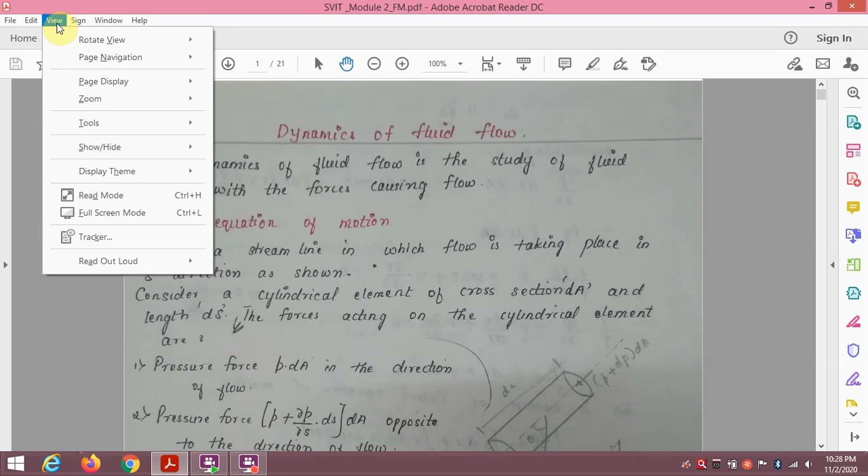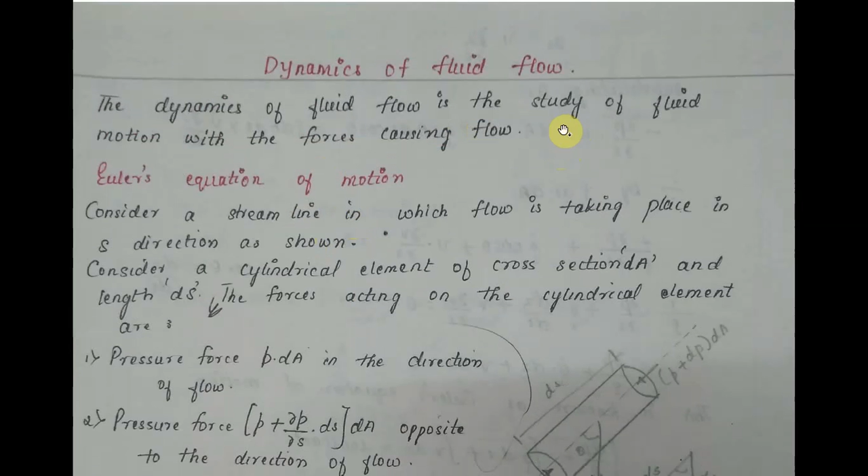So today I'm going to deal with the chapter Module 2 in fluid mechanics, that is dynamics of fluid flow. The dynamics of fluid flow is the study of fluid in motion with the force causing the flow.

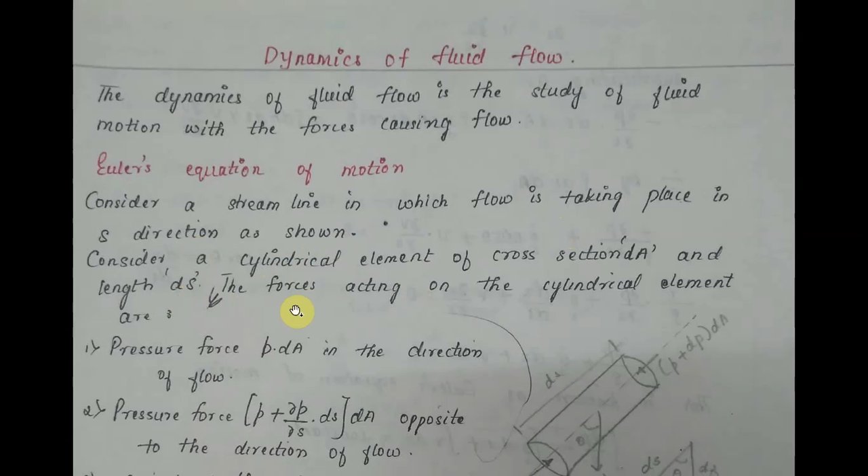So, Euler's equation of motion. Consider a streamline in which flow is taking place in the delta S direction as shown in the figure. Consider a cylindrical element of cross section delta A and length delta S. The forces acting on the cylinder element are: pressure force, that is equal to P into delta A, in the direction of the flow.

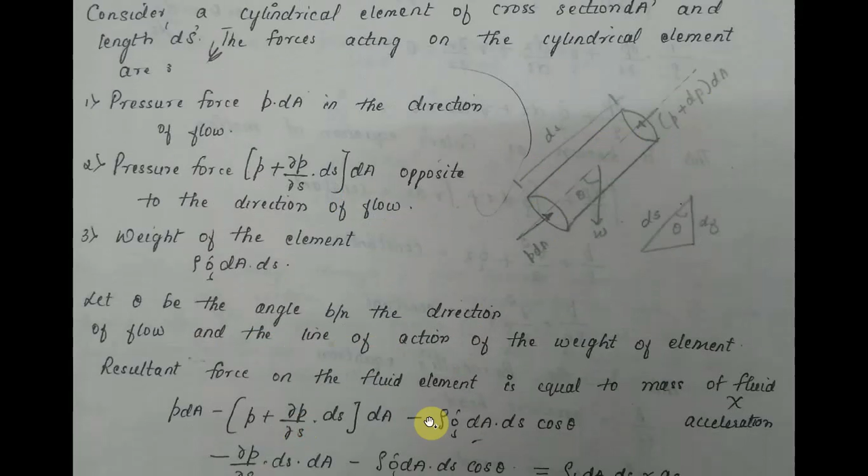Then pressure force, that is P plus delta P by delta S, that is P plus dou P upon dou S into delta S into delta A, opposite to the direction of flow. Then weight of the element, that is rho into G into delta A into delta S. Let theta be the angle between the direction of flow and the line of action of the weight of the element. The resulting force on the fluid element is equal to the mass of the fluid into acceleration.

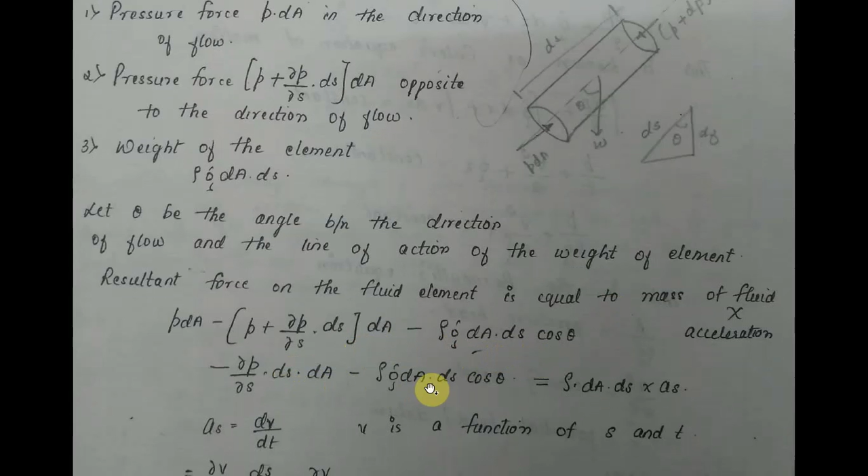Therefore, P into delta A minus (P plus dou P upon dou S into delta S) into delta A minus rho into G into delta A into delta S into cos theta. So, minus dou P upon dou S into delta S into dA minus rho into G into delta A into delta S into cos theta is equal to rho into delta A into delta S into a, where a is the acceleration.

Where a is equal to dV upon dt, where V is a function of S and t. Therefore, dV upon dt is equal to dou V upon dou S into ds upon dt plus dou V upon dou t, that is equal to V into dou V upon dou S plus dou V upon dou t, since ds upon dt is equal to V.

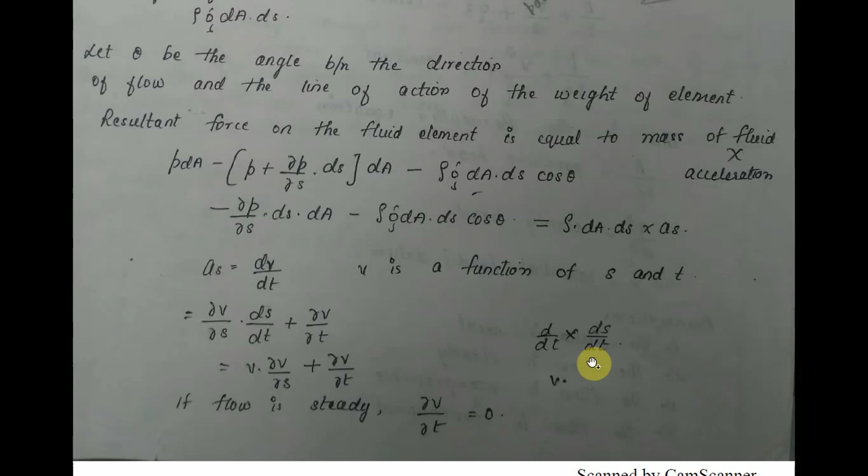Hence, if the flow is steady, dou V upon dou t is equal to 0. Therefore, a is equal to V into dou V upon dou S.

Substituting a, we get minus dou P upon dou S into ds into dA minus rho into G into dA into ds into cos theta, that is equal to rho into dA into ds into V into dou V upon dou S. Dividing throughout by rho into ds into dA:

We get dou P upon rho into ds plus G into cos theta plus V into dou V upon dou S is equal to 0.

Cos theta is equal to dou Z upon dou S. Therefore, 1 upon rho into dou P upon dou S plus G into dou Z upon dou S plus V into dou V upon dou S is equal to 0.

Therefore, dou P upon rho plus G into dz plus V into dou V is equal to 0. This is known as Euler's equation of motion.

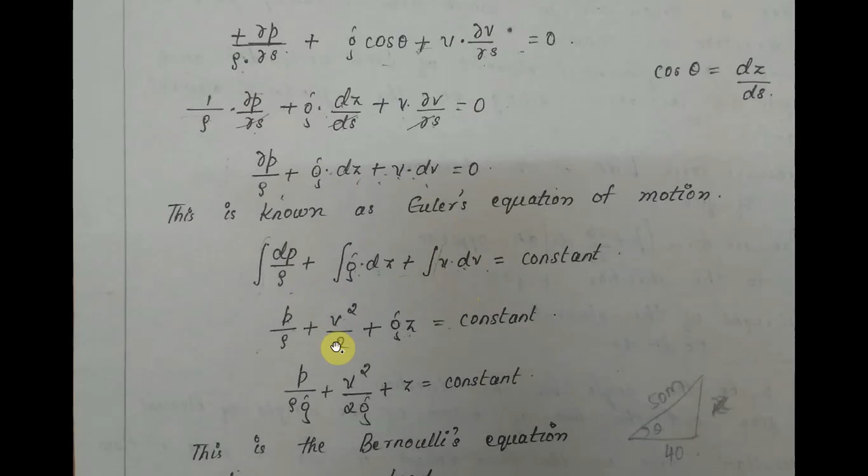Therefore, integrating: integration of dP upon rho plus integration of G into dz plus integration of V into dV equals constant. Therefore, P upon rho plus V square upon 2 plus Gz is equal to constant. That is, P upon rho into G plus V square upon 2G plus Z is equal to constant.

This is the Bernoulli's equation. Therefore, P upon rho into G is equal to pressure head, V square upon 2G is equal to velocity head, and Z is equal to potential head or datum head.

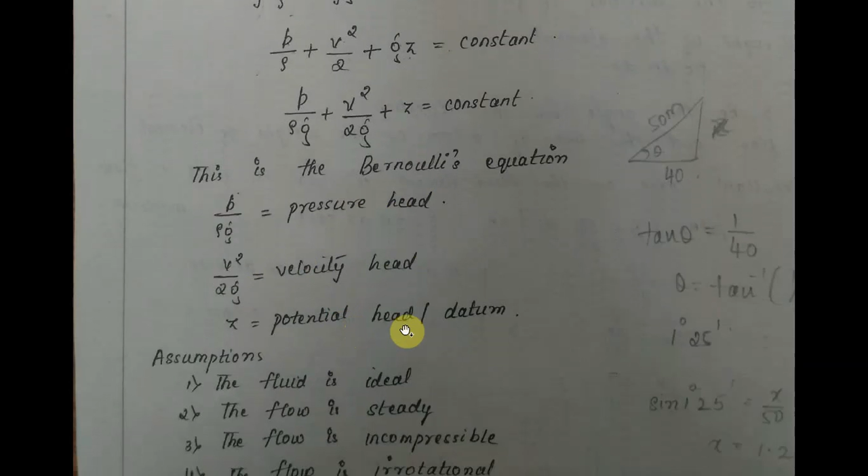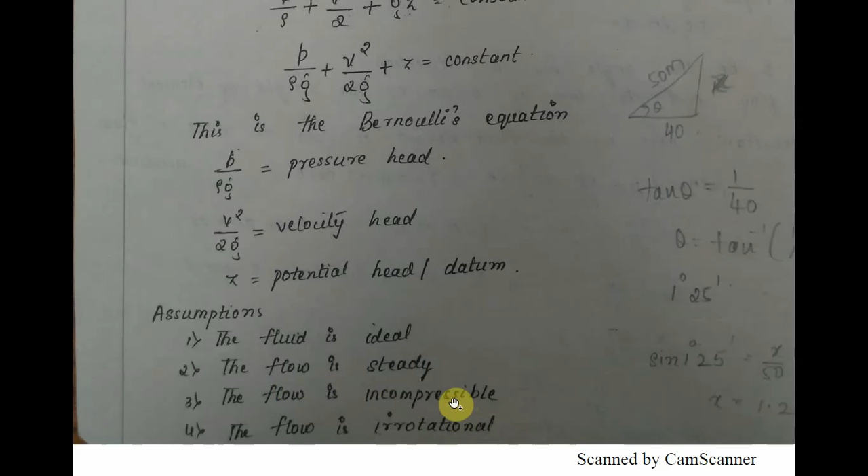So the assumptions for the above equation are: the fluid must be an ideal fluid, the flow is steady, the flow is incompressible, and the flow is irrotational. So these are the four conditions that should be assumed while deriving that equation.

So an example for this: water is flowing through a pipe of 5 centimeter diameter under a pressure of 29.43 Newton per centimeter square and with a mean velocity of 2 meters per second. Find the total head or the total energy per unit weight of the water at a cross section which is 5 meters above the datum line.

So diameter is 5 centimeters, that is equal to 0.05 meters. Then P is equal to pressure, 29.43 Newton per centimeter square, that is 29.43 into 10 raised to 4 Newton per meter square. V is equal to 2 meters per second. And Z is equal to 5 meters.

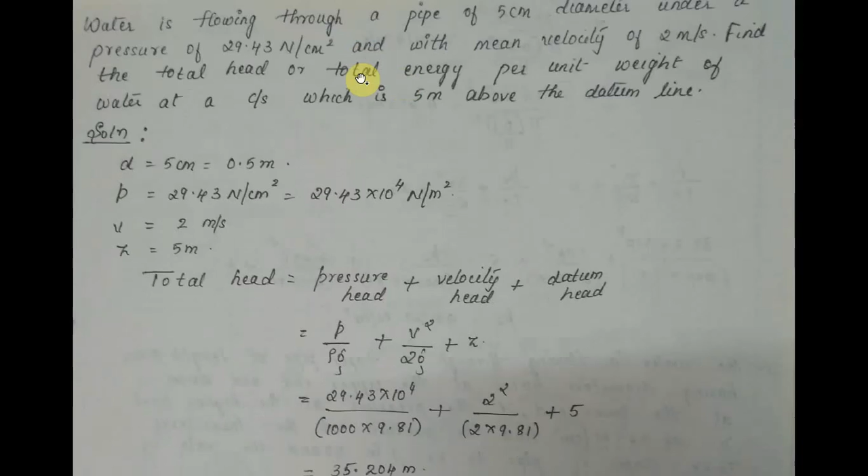We know the total head is equal to pressure head plus velocity head plus datum head. So the pressure head is given by P divided by rho into G.

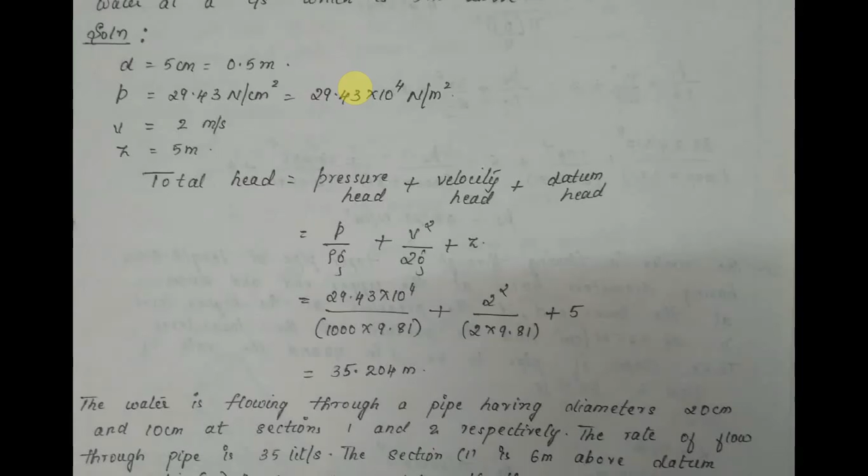Plus velocity squared upon 2g, plus z equals datum. So pressure equals 29.4 into 10 raised to 4, so 1000 into 9.81, v square is 2 square divided by 2 into 9.81 plus 5, that is equal to 35.204 meters.

The next problem: water is flowing through a pipe having a diameter of 20 centimeters and 10 centimeters at section 1 and 2 respectively. The rate of flow through the pipe is 35 liters per second. Section 1 is 6 meters above the datum and section 2 is 4 meters above the datum. If the pressure at section 1 is 39.24 Newton per centimeter square, find the intensity of pressure at section 2. So there are two sections: section 1 and section 2.

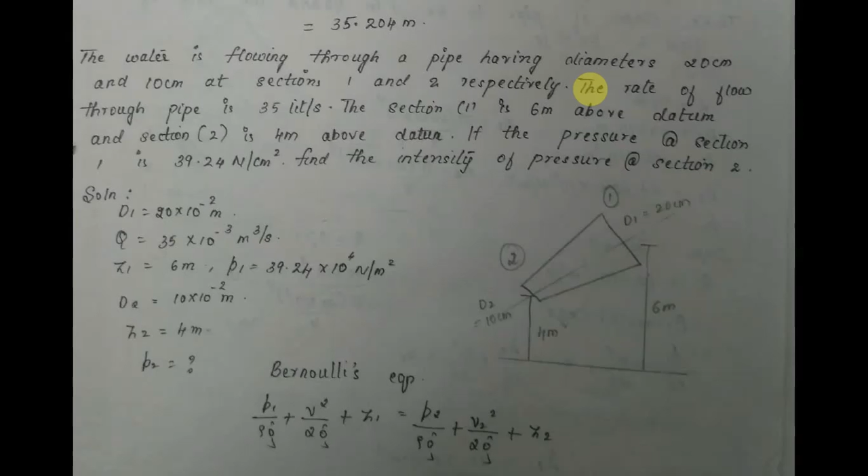Therefore d1 is equal to 20 into 10 raised to minus 2 meters. Q is equal to 35 into 10 raised to minus 3 cubic meters per second. Z1 is equal to 6 meters. P1 is equal to 39.24 into 10 raised to 4 Newton per square meter. d2 is 10 into 10 raised to minus 2 meters. Z2 is equal to 4 meters. Then P2 is equal to how much?

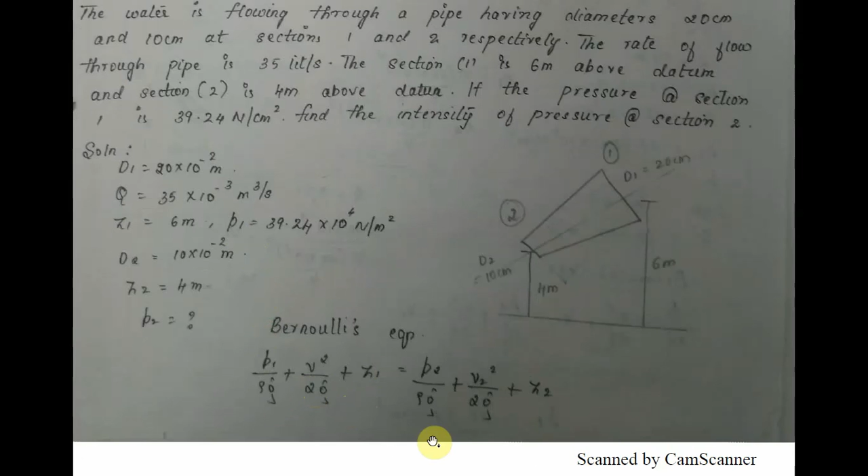Applying Bernoulli's equation: P1 upon rho into g plus V square upon 2g plus Z1 is equal to P2 upon rho into g plus V square upon 2g plus Z2. And we also know that Q is equal to A into V.

Therefore V1 is equal to 35 into 10 raised to minus 3 divided by pi into 0.2 square divided by 4, that is equal to 1.114 meters per second. And V2 is equal to 35 into 10 raised to minus 3 divided by pi into 0.1 square divided by 4, that is 4.456 meters per second.

Therefore P1 upon rho into g plus V1 square upon 2g plus Z1 is equal to P2 upon rho into g plus V2 square upon 2g plus Z2. So P1 is equal to 39.24 into 10 raised to 4 divided by 1000 into 9.8, plus V1 square 1.114 squared divided by 2 into 9.8, plus 6 equals P2 divided by 1000 into 9.81, plus 4.446 squared divided by 2 into 9.81, plus 4.

Therefore P2 is equal to 40.27 Newton per centimeter square.

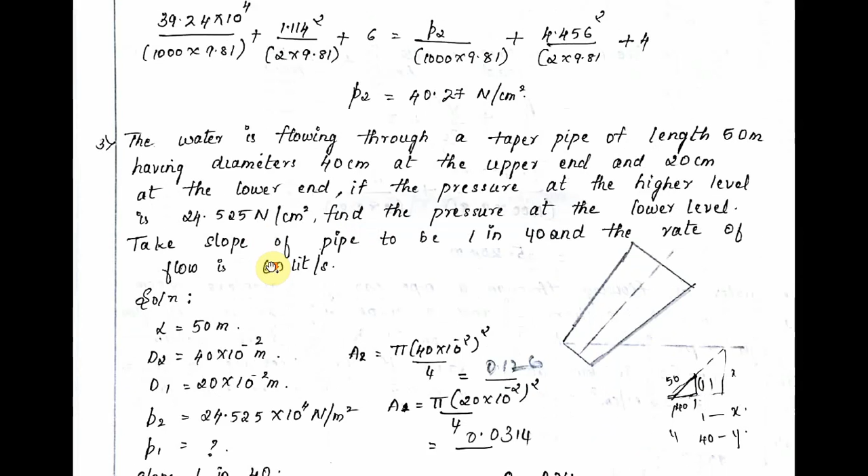Water is flowing through a taper pipe of length 50 meters and diameter 40 centimeters at the upper end and 20 centimeters at the lower end. If the pressure at the higher level is 24.525 Newton per centimeter square, find the pressure at the lower level. Take the slope of the pipe to be 1 in 40, and the rate of flow is 60 liters per second.

Length is equal to 50 meters and D2 is 40 into 10 raised to minus 2 meters. D1 is equal to 20 into 10 raised to minus 2 meters. Then P2 is equal to 24.525 into 10 raised to 4 Newton per meter square. P1 is equal to how much?

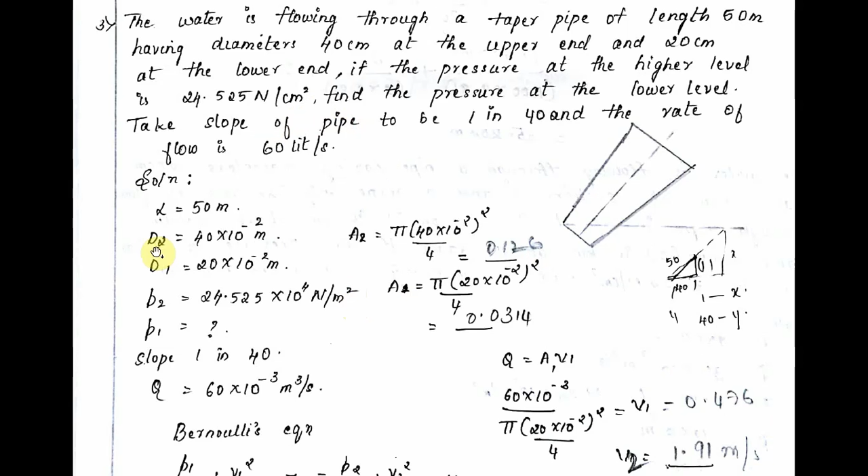A2 is equal to pi into 40 into 10 raised to minus 2 whole square divided by 4, then it is equal to 0.126. And we also know that Q is equal to A1 into V1.

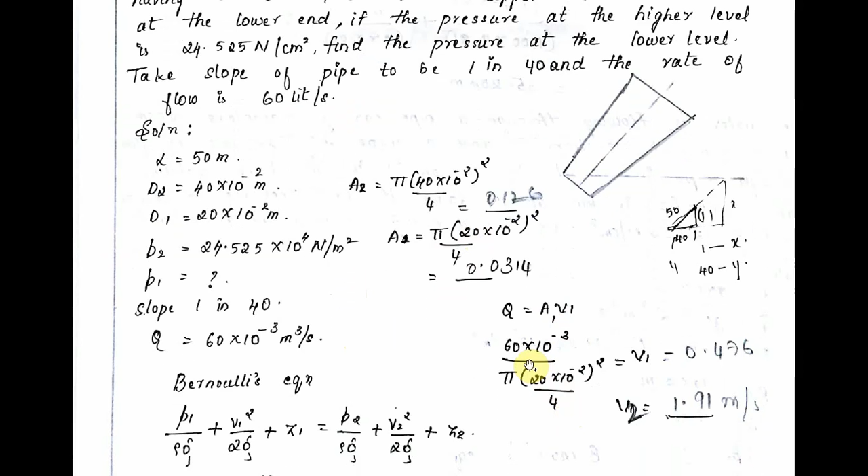Therefore 60 into 10 raised to minus 3 divided by pi into 20 into 10 raised to minus 2 whole square divided by 4 is equal to V1, that is equal to 0.476, and V2 is equal to 1.91 meters per second.

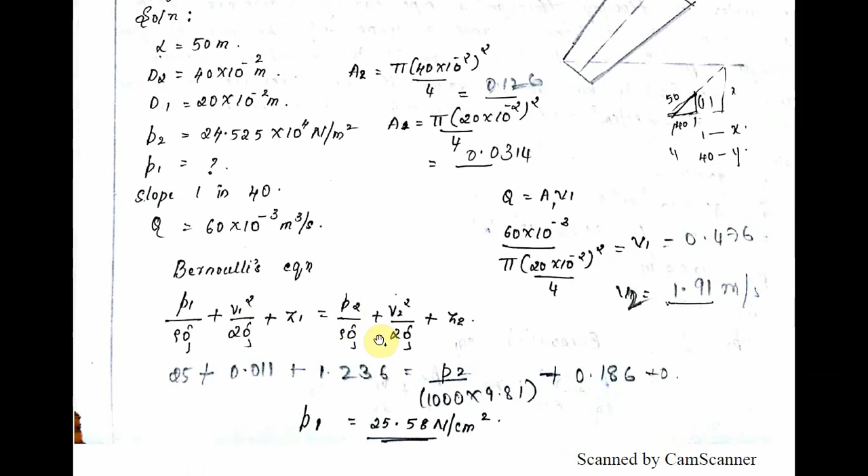So applying slope equal to 1 in 40, Q is equal to 60 into 10 raised to minus 3 cubic meters per second. Then Bernoulli's equation is P1 upon rho g plus V1 square upon 2g plus Z1 is equal to P2 upon rho g plus V2 square upon 2g plus Z2.

That is equal to 25 plus 0.011 plus 1.236 is equal to P2 divided by 1000 into 9.81, plus 0.186, plus 0, that is equal to P1 is equal to 25.5 Newton per centimeter square.